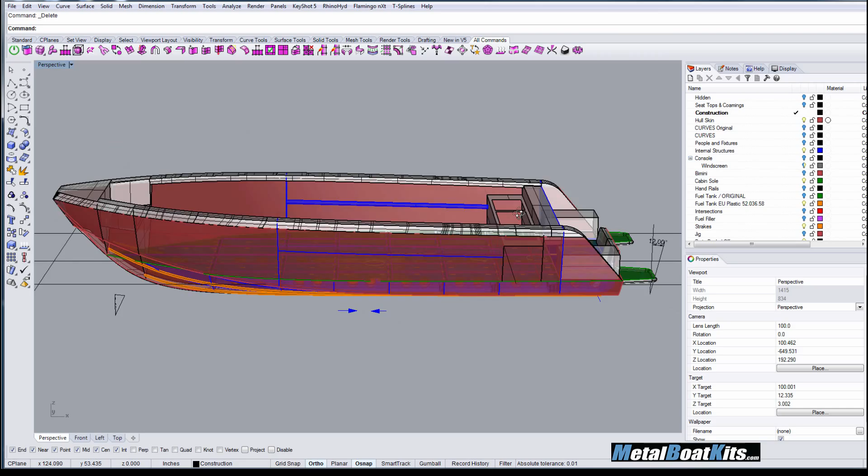I've been using Rhino since its inception, since version 1. I don't know exactly when that was, I think maybe 1997 or something like that. So I've got about 20 years of designing boats in Rhino, and I thought I might be able to share some knowledge with folks out there. So let's dive right in.

I have a 6-meter Euro style aluminum boat here. It's for a company in Europe that will be producing these on a serial basis, large production runs, so it's getting fairly involved. But today I'm just working on these little transom boxes. You can see I've roughed them in, but they need to have lids put on them and be manufactured using brake press and things like that. So it's time to jump on these and get them put together in a way that makes sense.

So I'll just run over here. I don't like to work on objects when they're intermingled with all the other objects because it's just too easy to miss and click on something else. So I usually move them aside.

I also like to point out that I'm going to keep this fairly simple. I'm presuming that a lot of people will be beginners, so if you're an advanced user, hopefully I will be having more tutorials in the near future and you can skip ahead. But this is just going to be basic stuff.

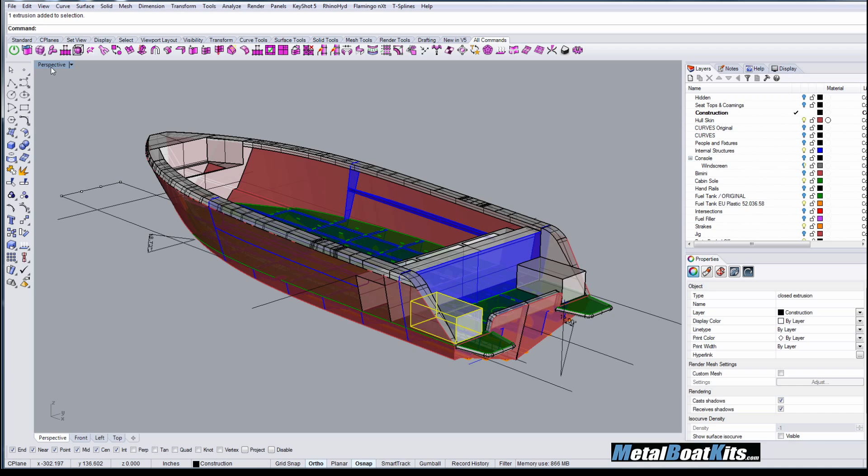So I'm moving over here to the left viewport. Double click on that, and then I'm going to hit the move command, and I'm going to move it off to about 200 units. So I'm going at minus 200 at 0 degrees. You can see up here I've typed in minus 200, that's the units, and the number of degrees is 0. And hit spacebar for enter.

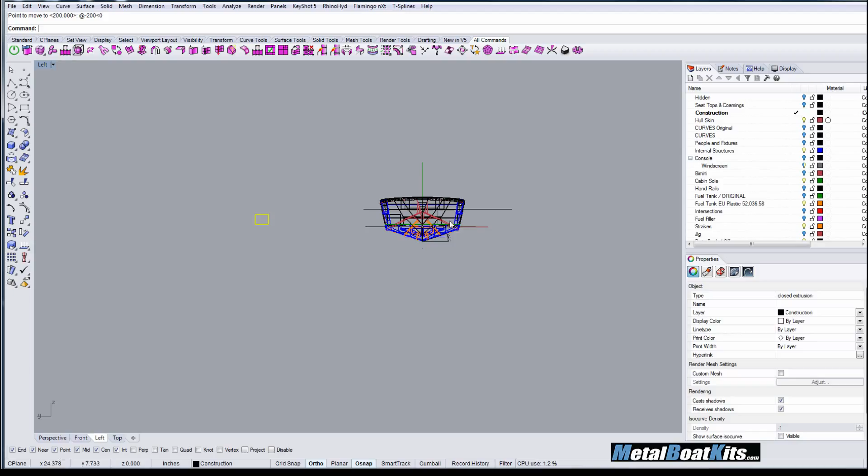Now the reason why I do that is it's a known location. I can work on it all I like here, and then I can move it exactly back to where it was. I know I just have to move it 200 units back.

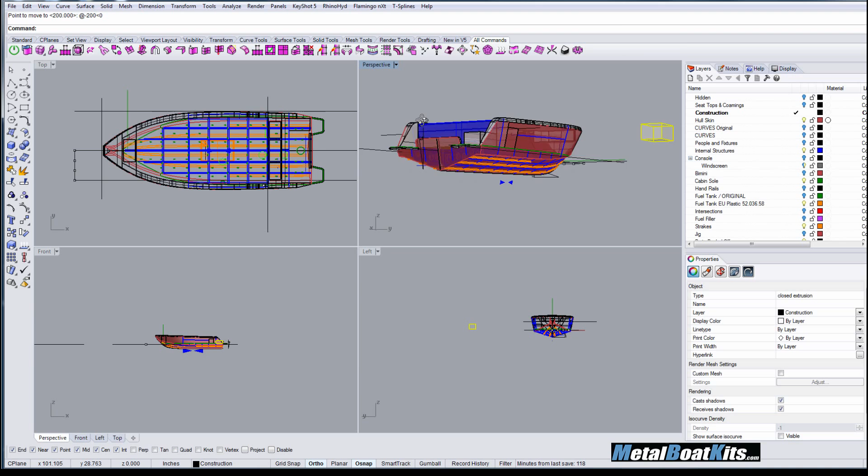So then we're up here in the viewport. I'll give you a little tip. I've activated the perspective viewport, and as you can see, it's going to be hard to try and work on it when it's floating around in space like this. I've seen some other tutorials where people are actually doing that. But what we can do is just hit zoom. So I hit Z spacebar, selected, S spacebar, and now I've zoom selected to bring the little box into the center of our viewport here.

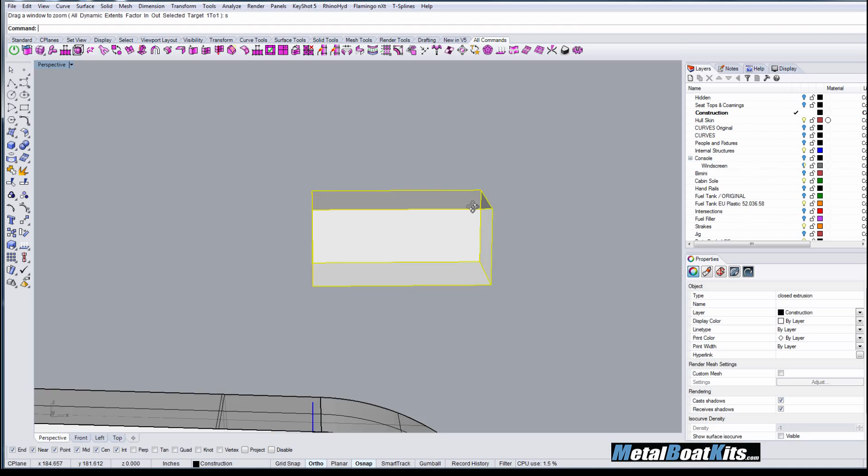And you can see the boat still over there. Let me just get my orientation.

So this is the port side boat. I'm not going to have any bottom in it because the transom, the swim grid here, is going to form the bottom of it, and the transom will form the back side of it. This will be the back side and the bottom. So I don't need the back side or the bottom, which is going to make it a little easier in production because we want to fold this on a brake press. It would be hard - I think it might be impossible almost - to fold all of this into a square cylindrical shape and then fold the ends up. You'll end up having to only do part of it and weld parts together.

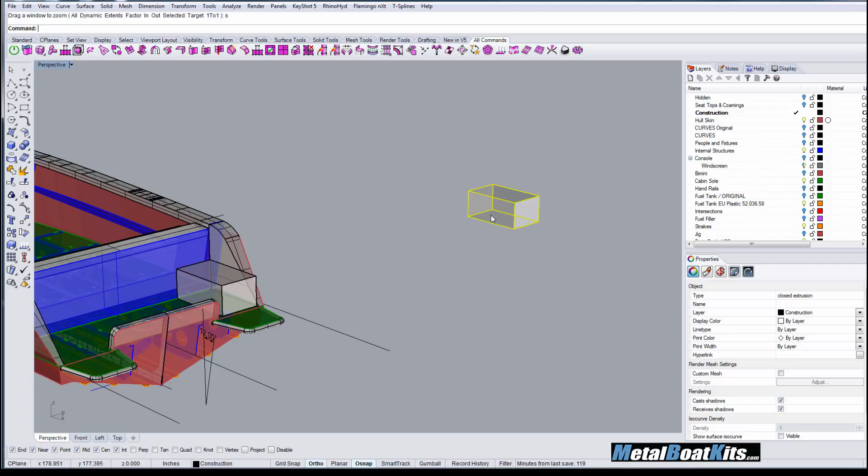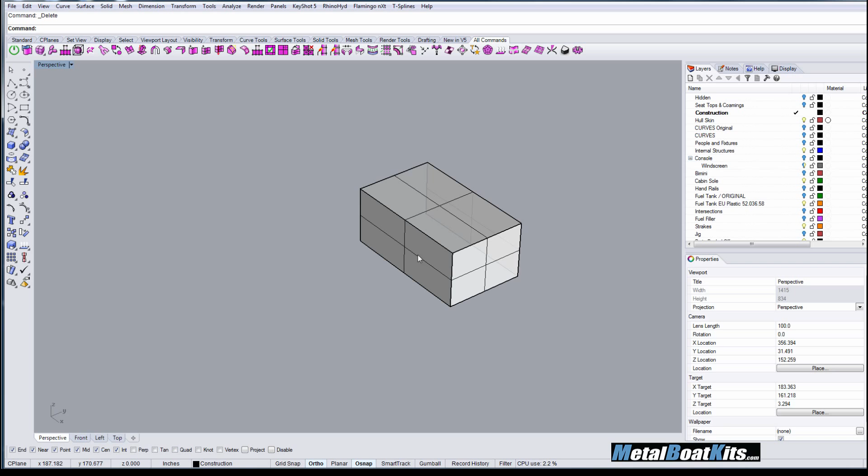So my workaround to that is I'm going to explode it using the explode command here, and then I can just delete that bottom panel, and I can delete the back panel. So now I've just got a shape like this that I presume will be a lot easier to fold on a brake press, because when it is flattened out, I would have them fold this piece up - this piece seam will be connected to the top, sorry. They would fold this part down, and then using the end of the brake press, they can fold this down and fold the other side down, so they can easily do this shape on a press.

Alright, now I need to cut a hole in the top of it. So let's just go over to the top view here. I'm just navigating using my right click to drag, and wheel mouse to wheel in and out. And we'll just get that into our viewport. And I know I'd like to have about 1 and a quarter inches all the way around.

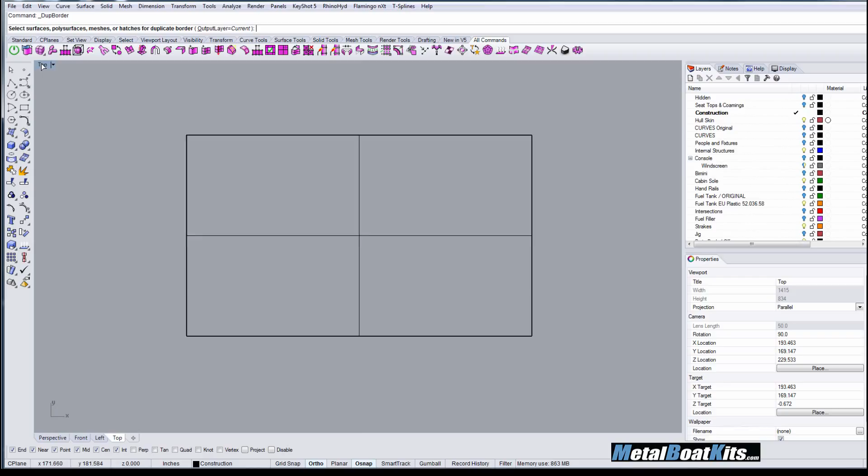So the way I normally do this is I just go to Curve, from Objects, and duplicate border. Maybe I'll actually go back to the perspective view so I know that I'm duplicating the right border here.

And right click to hit enter. So that gives me a curve. You can see the curve is around the top there. And now I'll just go offset, typing in offset.

It thinks it knows what I want, and it's right. I'm going to go about 1¼ inches, 1.25 inches as the distance there. Space bar for enter, and show it which side, and I want it to go to the inside, obviously.

The reason why I'm leaving 1¼ inch around this and not less is for the brake press operator, who needs some material to work with on each side of the fold. I found they don't complain as much when they have about 1¼ inch there.

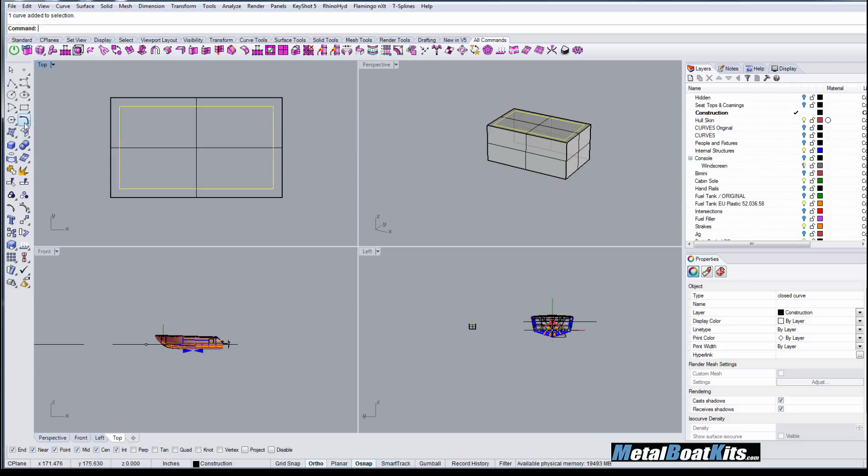Another way I always like to work is to select things first and then do my operation, so that when the operation is done, it's still selected, and I can just hit delete and it goes away. So now I select the inside curve here, and I will hit trim and simply trim out the interior, and right click to end the procedure.

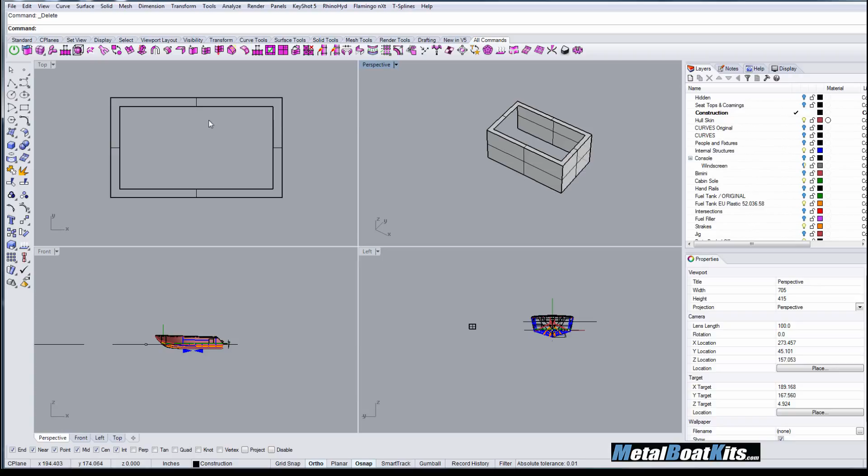Again, the line is still selected. I can hit delete and it's gone. So now I have a box with this top edge, just like that. Okay, I'm going to leave my screw ups in because I've been told that's the way to do it. I'm going to hit undo and get this edge back again.

Okay, so I have that hole cut out, and I've still got my curve selected that I used to cut the hole. I want to put a 3/16 inch flat bar coaming around this hole that will act as a lip for the lid, as well as strengthening the top of the box, as well as a coaming to keep the water out.

So I happen to know that 3/16 of an inch is 0.1875 inches, because I'm working in decimals here. So I will offset. Okay, offset.

I didn't have Rhino highlighted as the active window. Okay, so you can see here, 0.1875 offset to the inside here. Okay, so you can see now we've got two curves there.

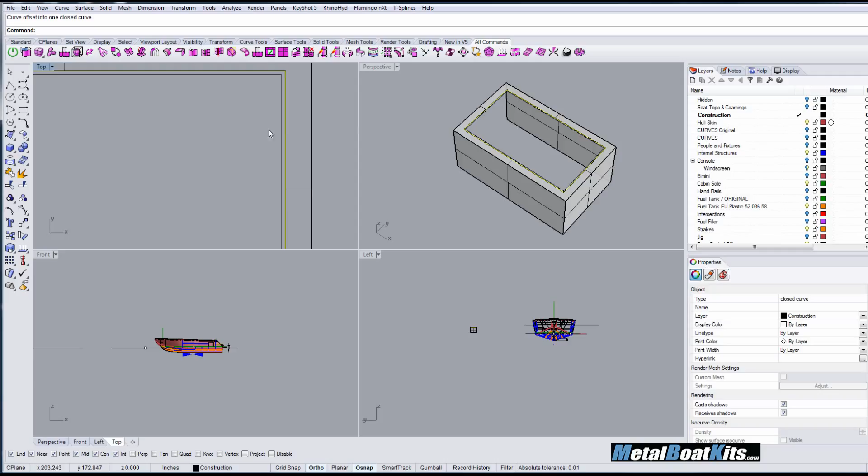Probably a little easier to work in perspective view here. So let's select both curves. There is an easier way to do this. I mean, I could have just cut this out of the original surface on the top as well, but I just wanted to show you some other commands. This is always a favorite.

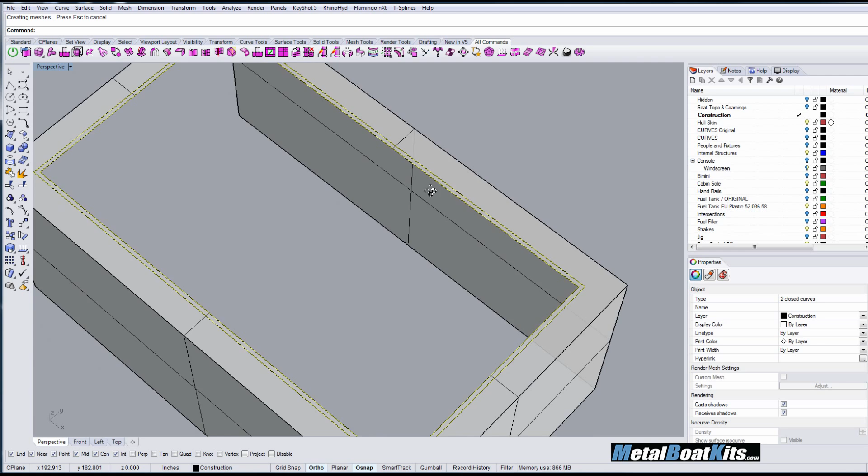From planar curves here, we can use the planar curves command, and it'll make a surface for us from the planar curves. And as I pointed out before, these are still selected, so I could delete them, but in this case I am going to keep one of them and just delete the inside one. You'll see why in a minute.

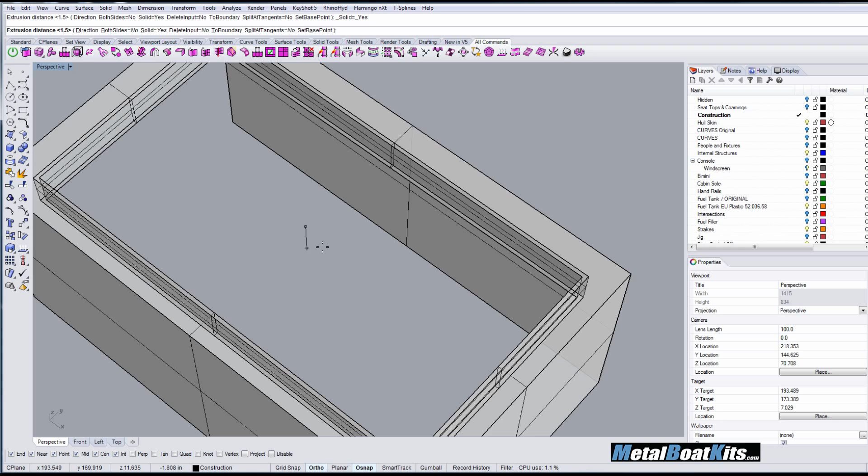So select this surface, and I'll go over to solid, and we will extrude a surface. I hadn't really thought about it, because this is non-structural, I hadn't given it much thought as to how wide the flat bar is. I think I will actually go with 1.5 inches, which is what's already selected here. So I'm just going to hit enter, and you can see it's created.

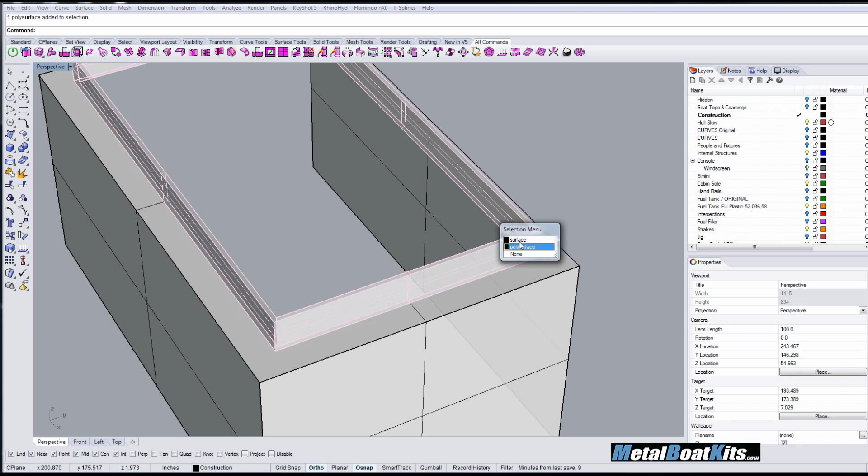I just want to get rid of that original surface. Boom, because now I've got this solid.

Just zoom in on an angle here, and we want to just move this. I have my ortho on here, so it's just going to go straight, as long as I can have a reasonably straight mouse position. I'll just bring it down for now to an arbitrary measurement. I'm not sure exactly where it's going to line up.

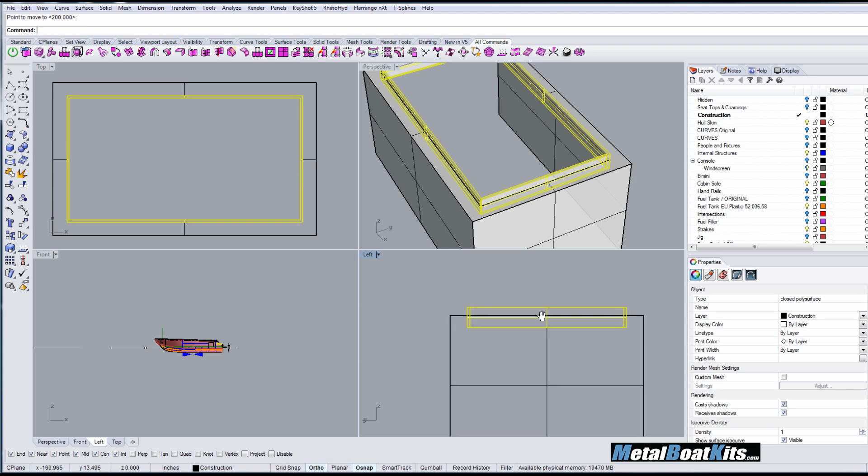Let's go back to our perspective view, and you can see that this is going to strengthen the top of the box, as well as giving us a nice coaming around it to keep the water out.

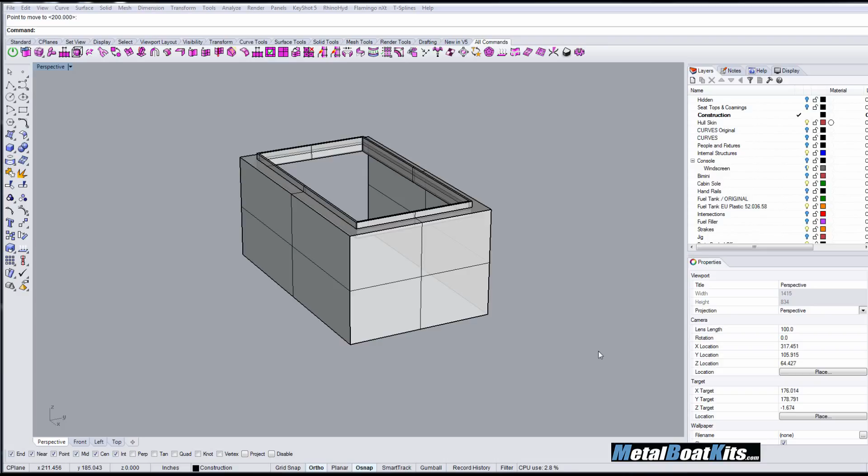So I want this coaming and the seat top, or I guess the top of the box, to match the seat tops and coamings that I have on the rest of the boat.

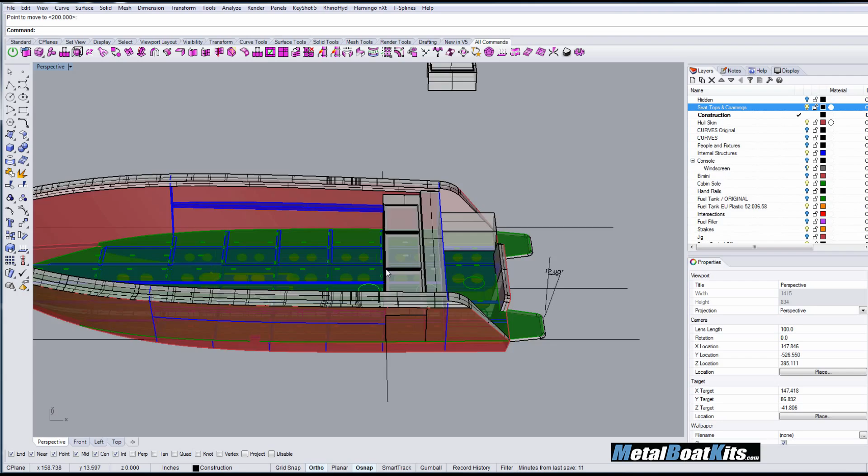So I'm just going to turn on this layer because it was off. And you can see the orbiting is way off of where I really want to be. So I'll just select, say, that top there, and just hit zoom selected. I can zoom out a bit with the mouse wheel. Now I can orbit around that perfectly and zoom in and show you what we're working on here.

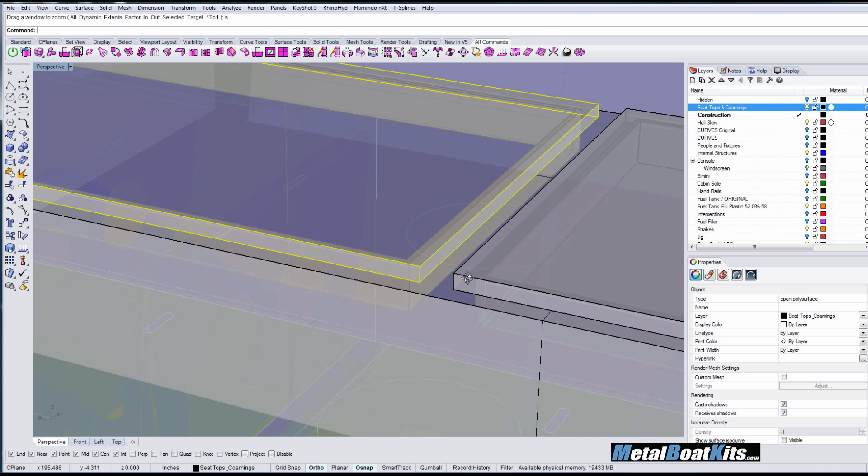Same type of idea, I just wanted to go back to visit this and see what distance I've got, how big the lip is on the cap, and also how much coaming I've got sticking up.

So that command is up here in Analyze Distance, and I just want to analyze the height of this edge around the top here, and it looks like it's probably about a ½ inch.

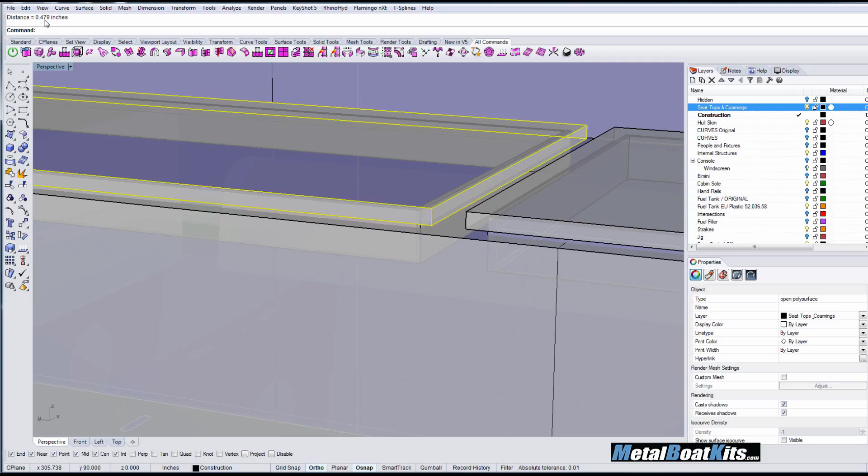Let's do the same thing for the coaming. 0.479, and I guess we've got, let's just try it again.

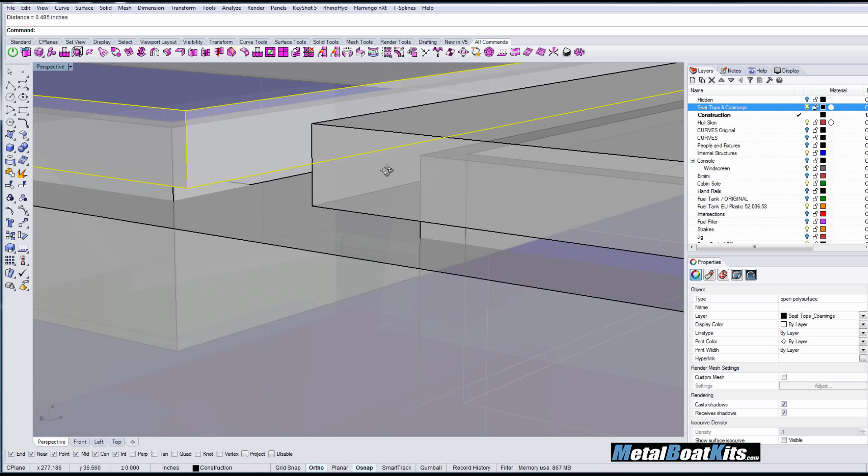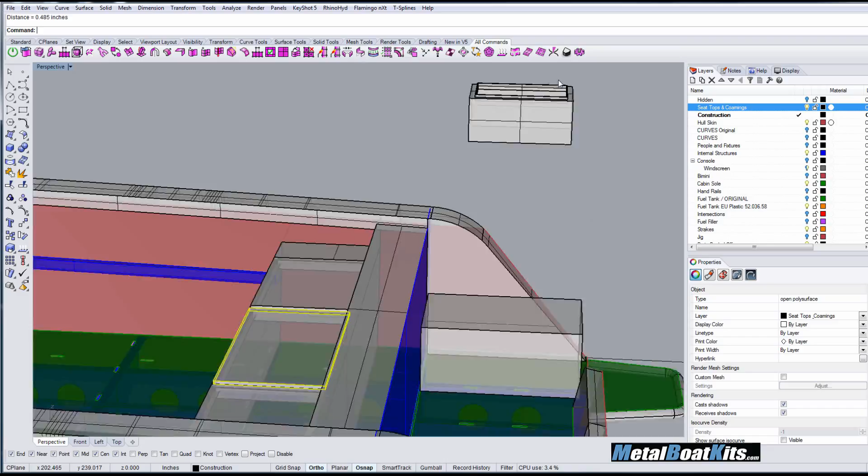I'm going to call it a ½ inch. This is not that terribly important, because the builder is going to make the decision as to how high he wants the coamings. I'm just going to give him this, in this case it's seat tops. That's why I keep referring to it as a seat top, but it's going to be a lid for this box that we're building. So let's just go back to that.

Zoom selected, and I think I'm going to go back over here to this. I'm just going to eyeball this. Escape, deselect, select that. I'm just going to eyeball this down to there.

And then I'm going to move it up to maybe 0.6 inches. So I'm going to go at 0.6 inches at 90 degrees. Again, up here in the command line, at 0.6, which is my units, inches, at 90 degrees, which is vertical. Hit enter, and she's popped right into giving me about 0.6.

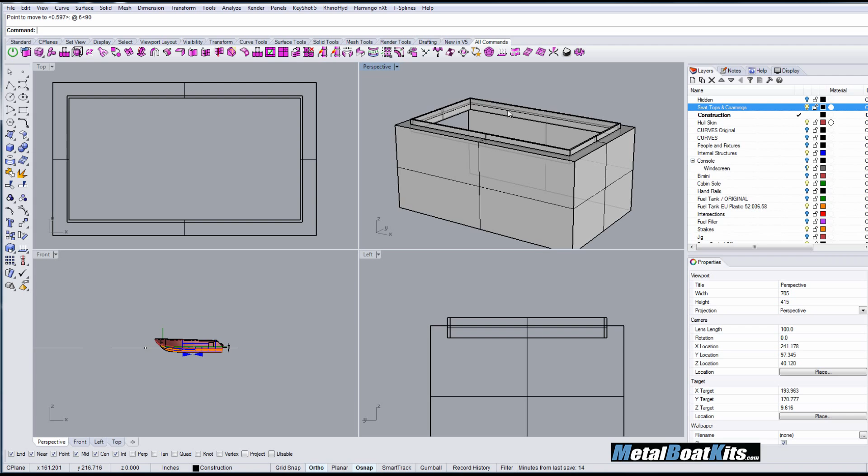So I can do a ½ inch lip and know that I have enough clearance there. And again, the coaming is going to be completely up to the builder, so he might want more, or he might want less. And he might use whatever flat bar he has on hand, to be honest with you.

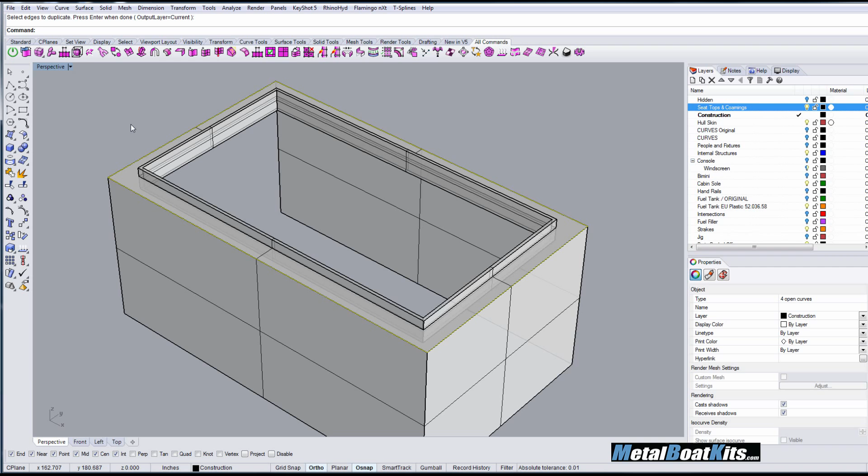So, okay, I just want to create another curve, network of curves here. This time I'm going to use the duplicate edge command, just to show you guys that one. This is asking me whether I want it to duplicate the edge of the side or the edge of the top. In this case, it doesn't matter at all because they're the same. So I just want 4 curves. Right click to hit enter. J for join.

Okay, so now we're at the point where we're going to create a lid for this. I know from the other seats and everything that it goes about 0.3, 0.4 inches beyond the coaming. With this, so what I'm going to do...

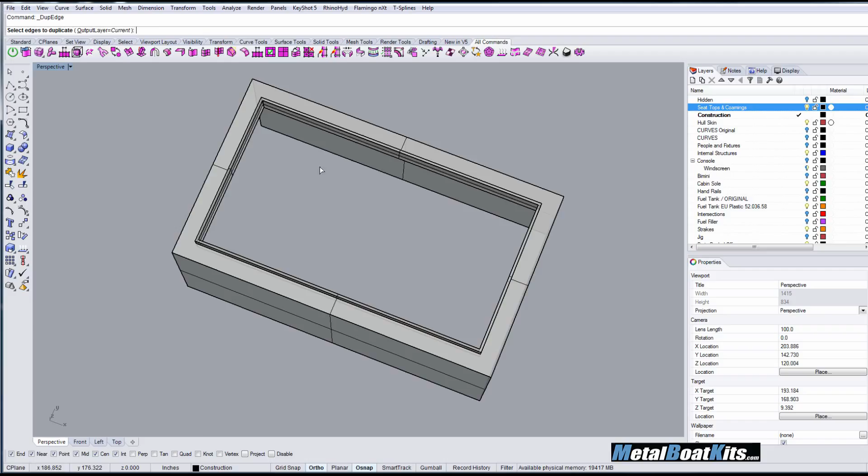Is go back to curve from objects, duplicate edge, and I'm just going to duplicate the edge around this coaming here. Again, oops, wrong one. And while we're in the command, we can hit Control and deselect that, and just get a better view of these things while we're selecting them.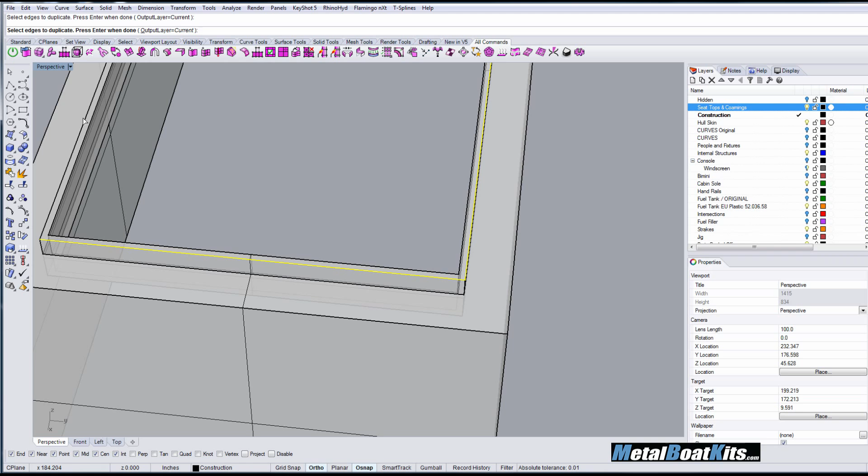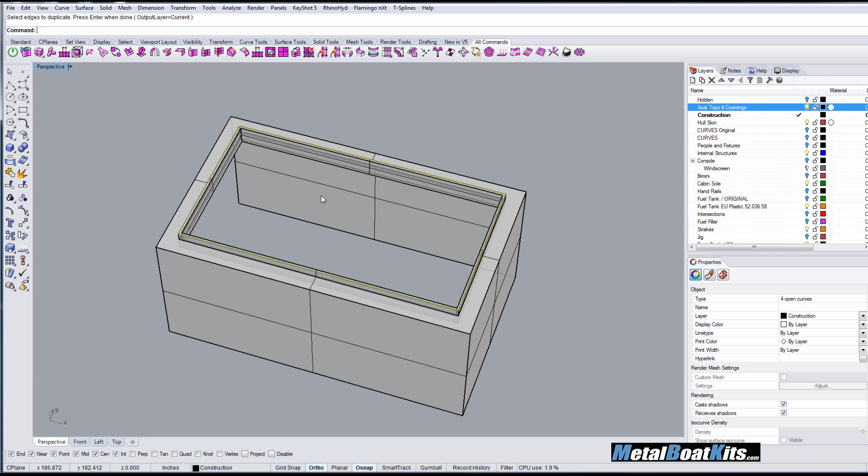You'll notice when you're using the mouse to zoom in and out, it zooms at the point where the mouse is. So if I want to look at this piece over here, I put the mouse over it and zoom in. One of the many wonderful functions of Rhino. So I've selected those outside edge curves there, and I'm going to right click to hit enter. And I'm just going to hit J for join, just for good measure, in case I lose the selection, so I can easily select them all again.

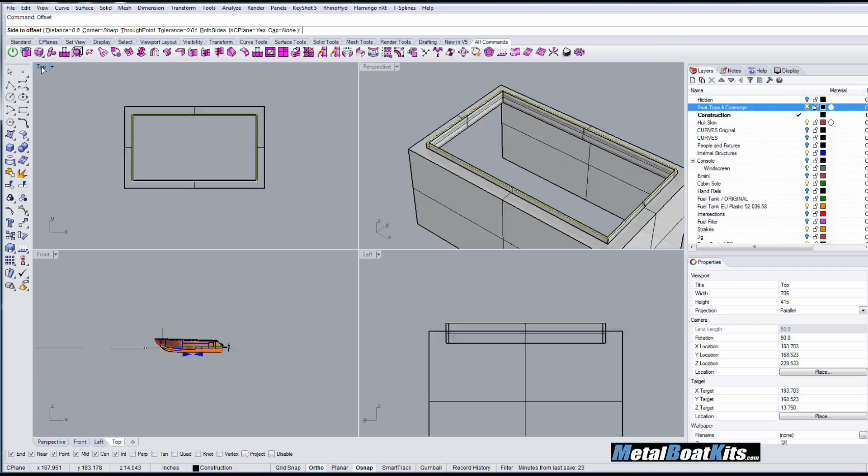And then I just want to offset this again. So I type offset. And perhaps easier to show you this from the top view. Again, so I think probably about 0.4, because this is probably going to be 1/8 inch thick material, 2 millimeter kind of stuff, 2 or 3 millimeters. So I'm just going to go 0.4 to give myself some clearance.

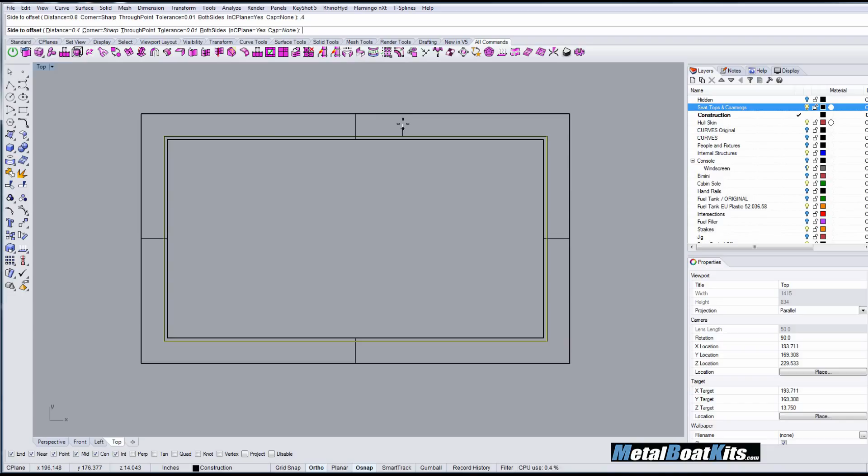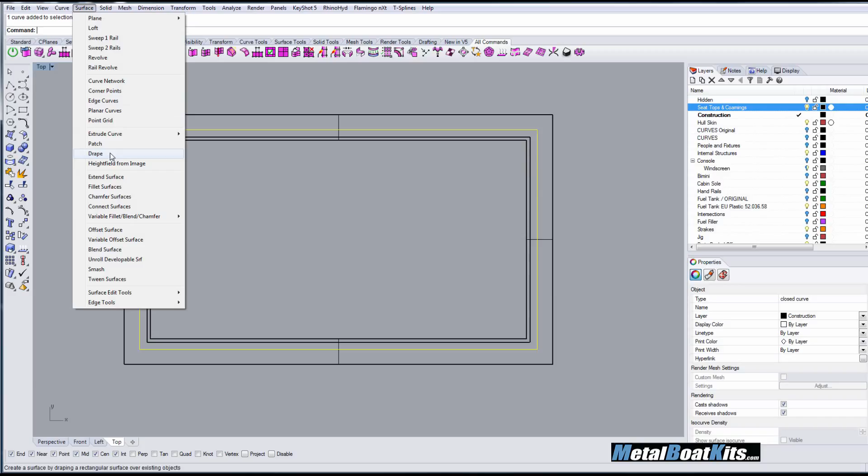Once the part is press brake into shape, I'll show you what I mean in a second. And I'll probably just delete those curves. Take this curve and make a surface from it, from planar curves, that gives me a surface.

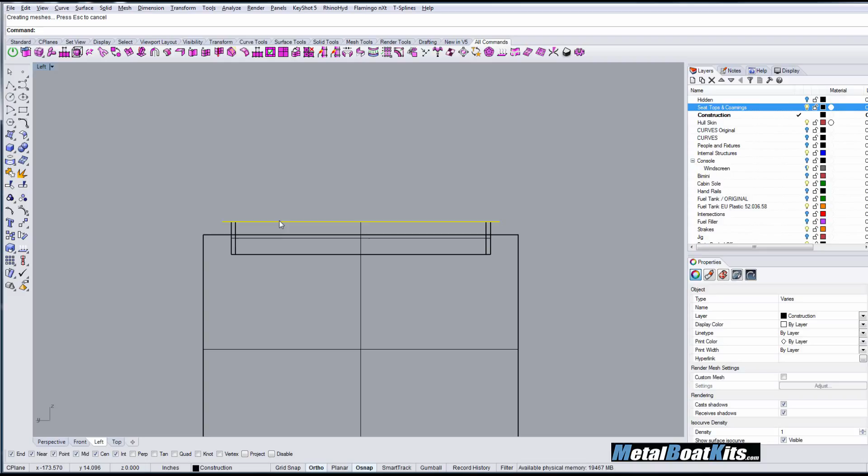And I think I'll just select the curves and that outside perimeter curve and the surface together. Go in here to the front view, which actually says left view. And I'm going to hit the Alt key and the up arrow and just move it up just a little bit, because for right now it doesn't matter where it's actually sitting. Let's go back to our perspective view.

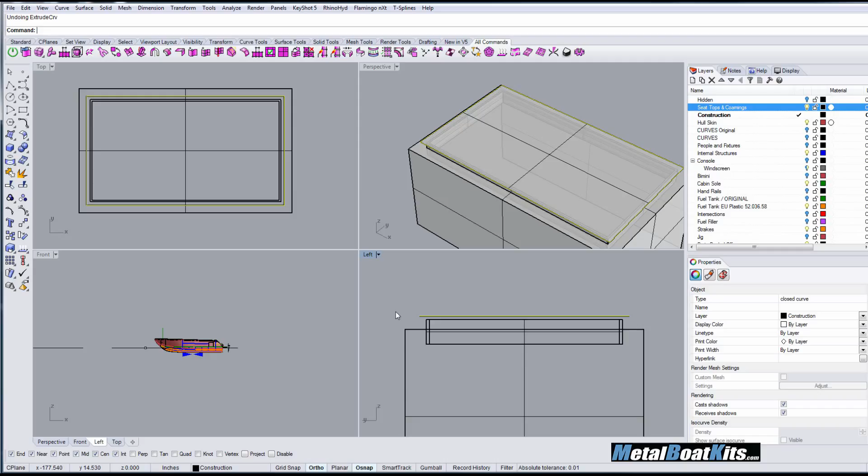And we want to select that outer edge curve again, and we're going to extrude this down 1/2 inch to match all of the rest of our hatch covers and seat tops. So, surface, extrude curve, straight, and we're just going to type in the amount, 0.5 inches, hit enter. Went the wrong way, of course. So, Control Z, hit enter to repeat the last command, and we're going to go minus 0.5. Obviously we want it to go down, not up. I'll leave my mistakes in for you.

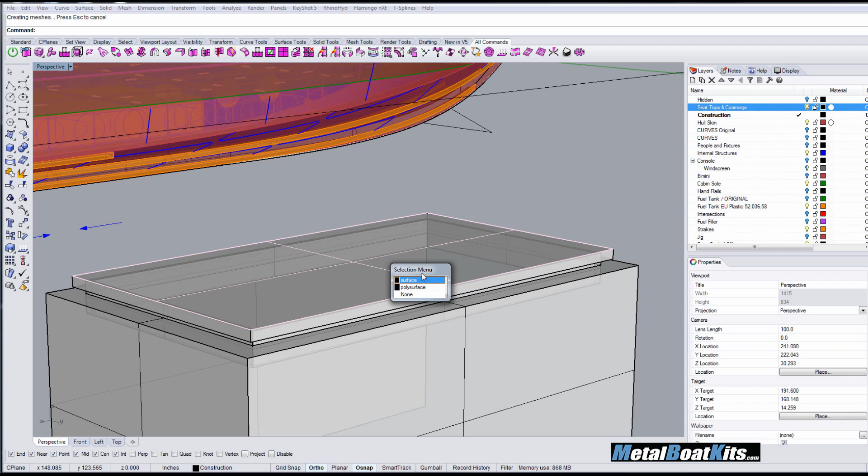And again, this is all we're really trying to accomplish, getting this top section and the box itself. So we're not too worried about it looking a little silly sitting up so high here, but when the builder builds it, it'll be further down to suit his hinges and things. So I'll show you what I mean.

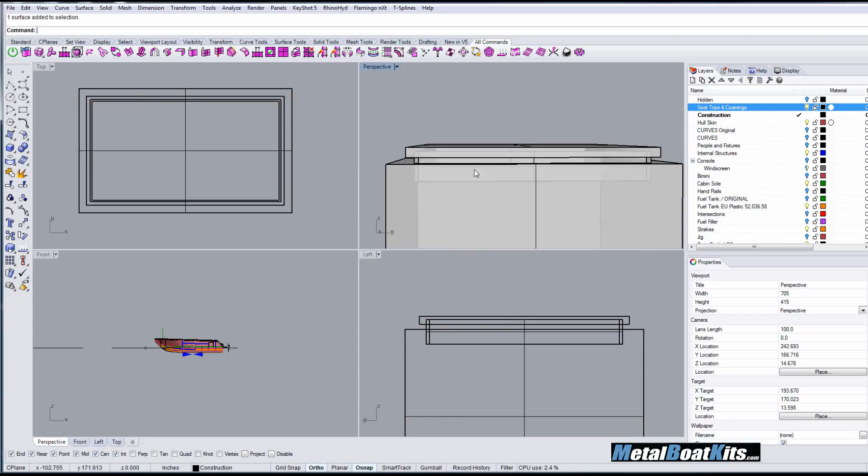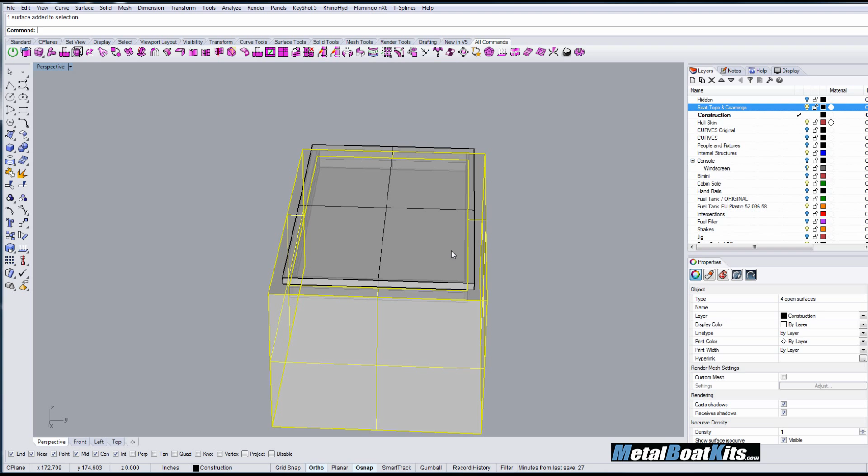I'm probably confusing you, but first I'll join everything that I need joined here. I'm going to hold Shift, select all these surfaces. Oops, Control and deselect that. So this is giving me the top and the sides of the box. J, and spacebar to join those.

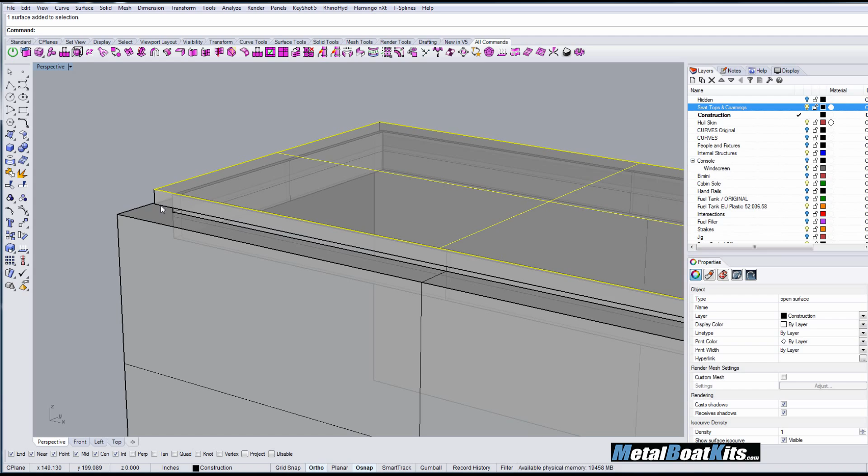Oops, right click to get out of that command. Selecting the top surface, and shift to select the edging all the way around it. Because it's one surface, it selects in one piece. J and spacebar to hit enter to join that all into one piece. So now we've got a lid and we've got a box.

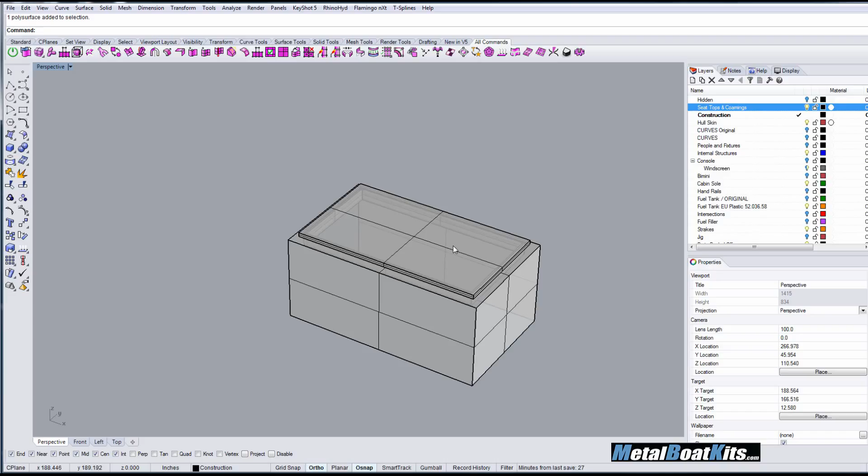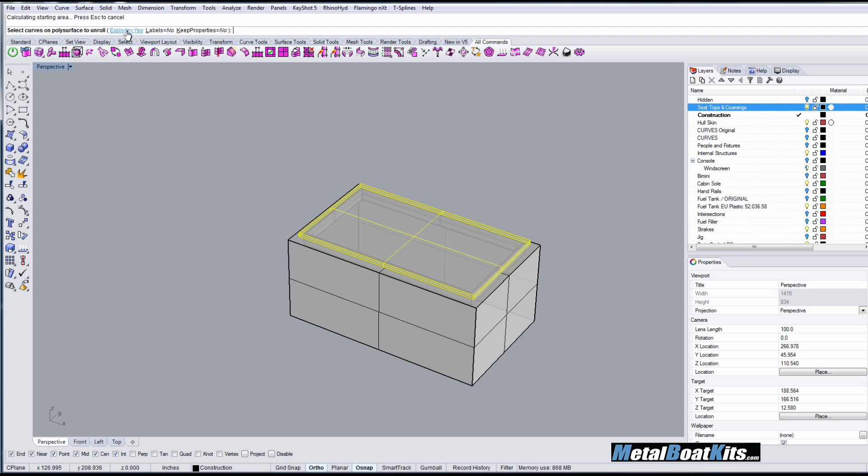And later when we unroll developable surface, I hope I'll show you what will happen. We go here, surface, and unroll developable surface. Explode, no, because if it was left at explode yes, these will become 5 separate pieces, and we want it to remain joined. And Rhino makes a good guess at where we want the joins, but usually gets it wrong. So I'll just show you the process of doing this.

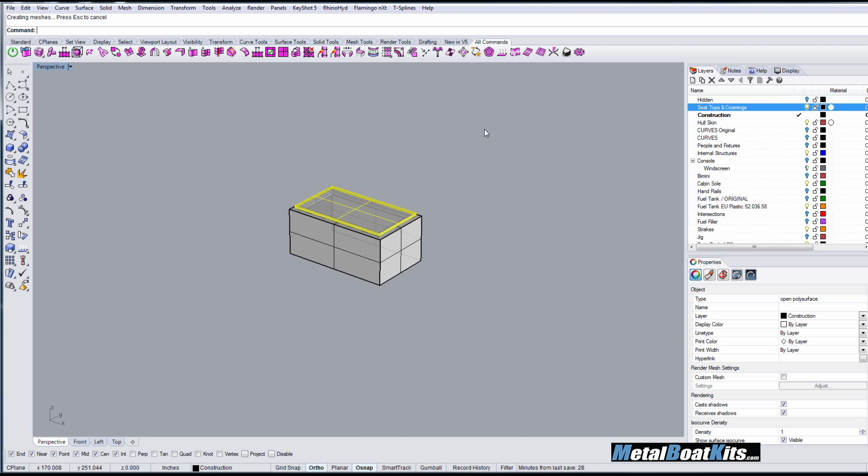Keep properties. In this case, labels. This kind of thing is not really necessary. That would just show us where the edges were, where everything was joined, and this is a fairly simple piece, so we know where it was joined before. So I right-click to hit enter, and it's going to get messy, but where did it put our parts? Yeah, like I said, it's going to get messy. Here are our parts.

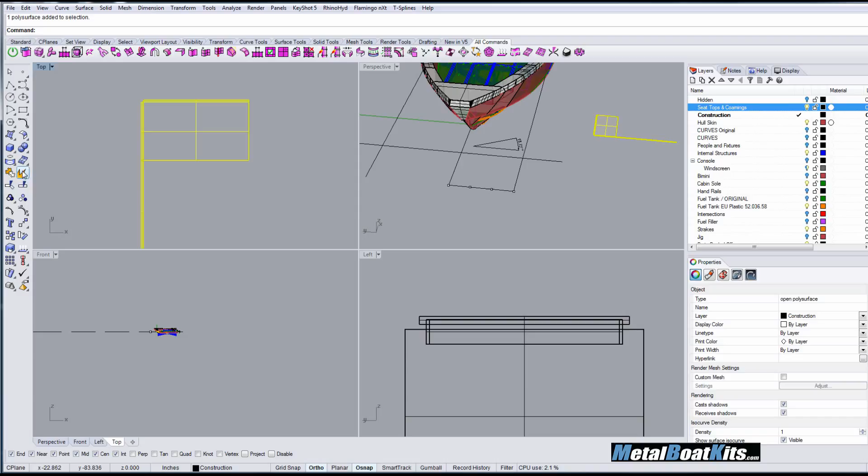And Rhino made a fairly good guess at where it thought we wanted all the parts joined up, but it didn't get it completely right, so we'll explode this. See, it's got this edge and this edge in the right place, but it thought that the other 2 edges were joined end to end. Typical type of situation, and it's really easily fixed. We hit explode, and now we've got this piece.

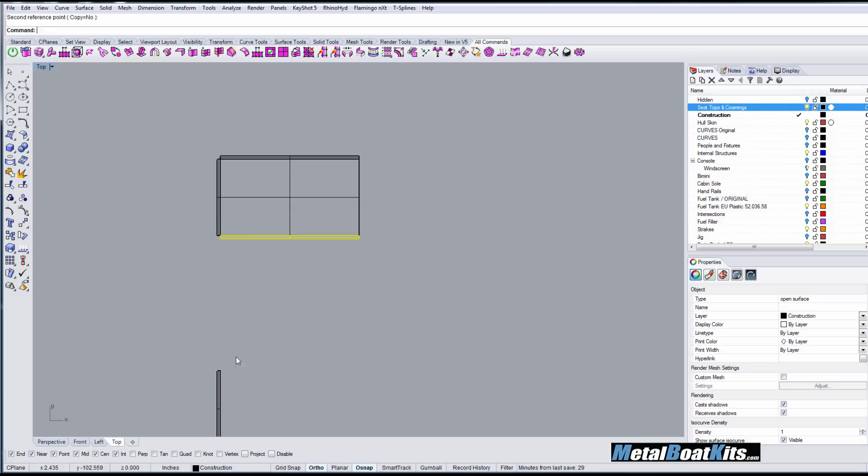We will go to rotate, select it right at the corner there. We've got our ortho on, so it's going to snap there. And I'm just going to undo that. One sec. I should have done it with both of them. Like that. Do it again. And there's our box top. I would rejoin all of this. J and enter.

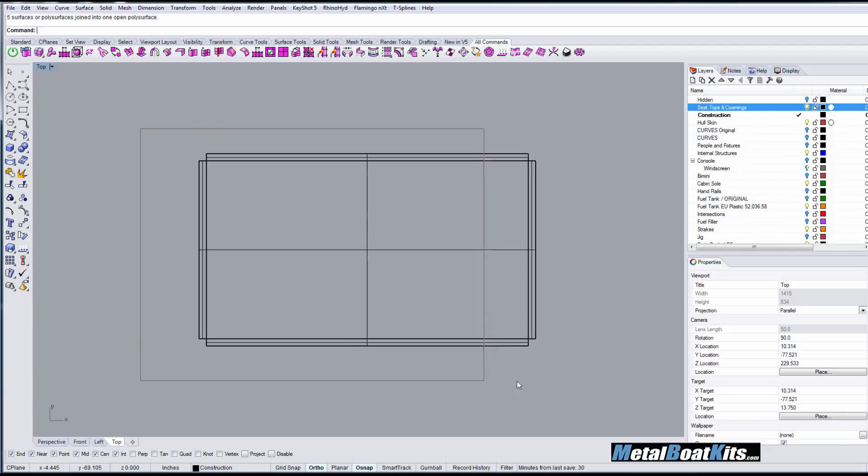And then, because we want to send it out to CAD, we go in here, curve from objects, and just duplicate the border of the whole thing, and delete our surface. And this gives us what we want to give to the CAD guys. And I would just draw in some lines like this for the CAD fellow, and usually make this a different color, like green, and put an indication and just say fold up 90 degrees on the green line after it's CNC cut for the perimeter.

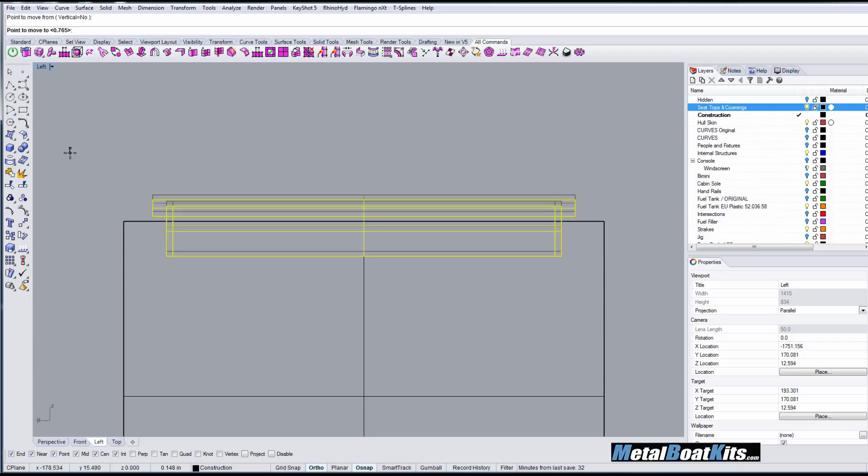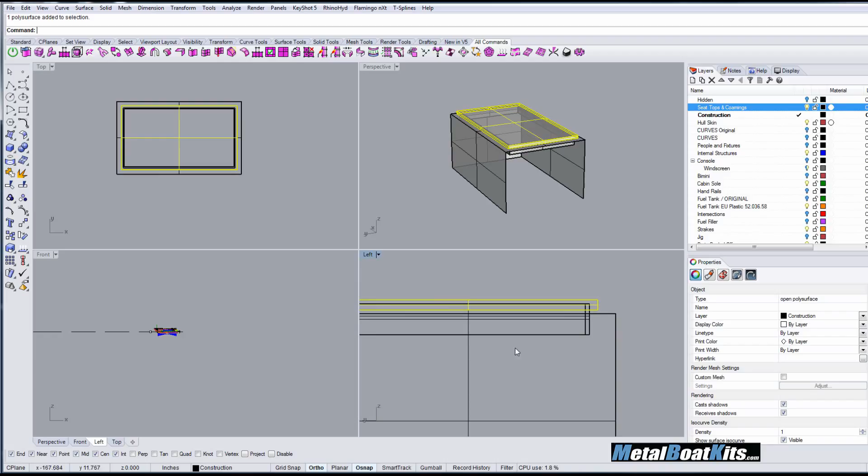Okay, and as I was saying earlier, this is sitting a little bit proud, it's too tall. And me moving stuff right now is just for aesthetics, because I'm going to be taking this out to a nice rendering for marketing. But that kind of gives us our box. It's going to be opening to the left. Where's my boat? It's on that side of the boat. The left side will be opening. And so I'm just going to rotate this up a little bit, just for aesthetics.

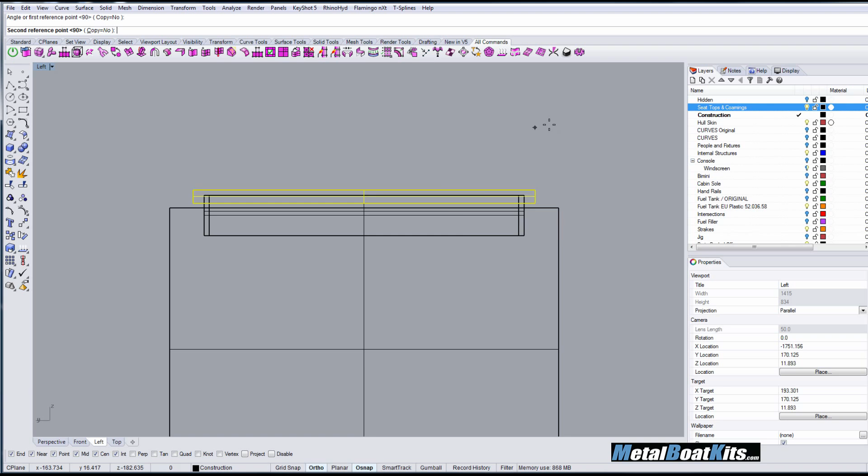And here's another tip for you. See how I've got my ortho on and it's snapping all around. So it would snap to 45 degrees. And honestly, maybe 45 degrees is what I want in this case. But you can just hold shift down. This is a tip I want to give you. You can just hold shift and it overrides that ortho. And that goes for anything where you've got a snap happening. You can just override your snaps by doing that.

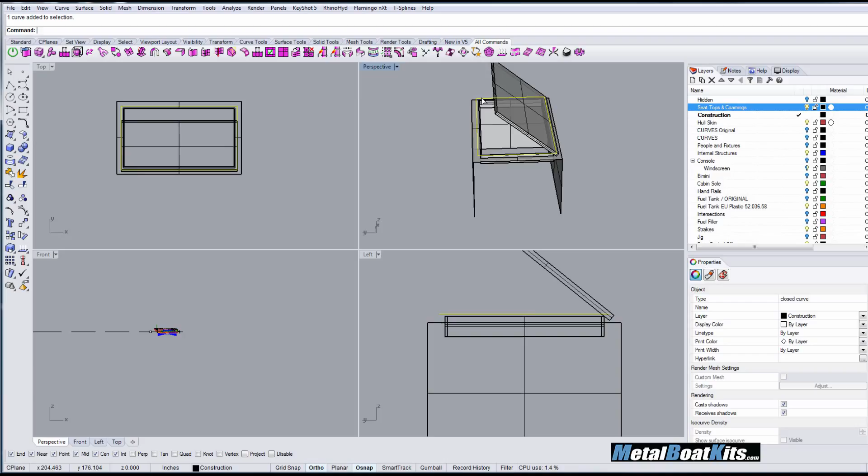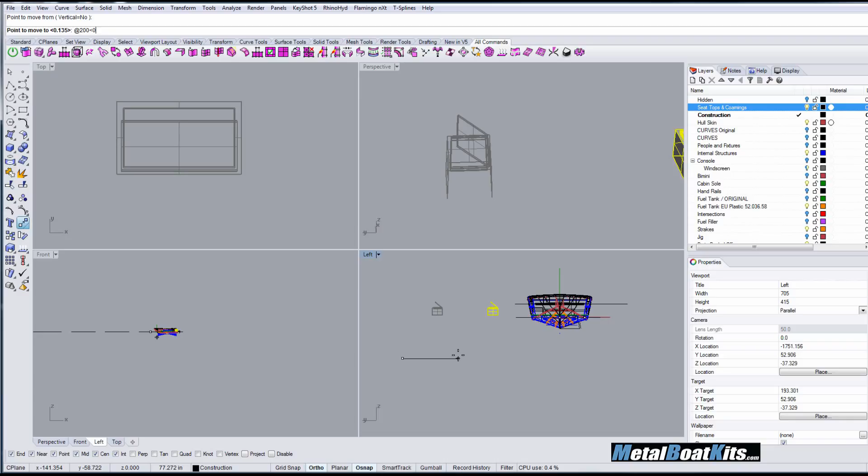We'll just leave the box lid open and delete that curve that we don't need. So let's select it. And this is what I was showing you earlier. I can just move it back into place on the boat. Hit the move command. I want to move it 200 in the positive direction, so it's not a negative, it's just 200 at 0 degree angle. Just keep it level. So again, 200 at 0 and hit enter.

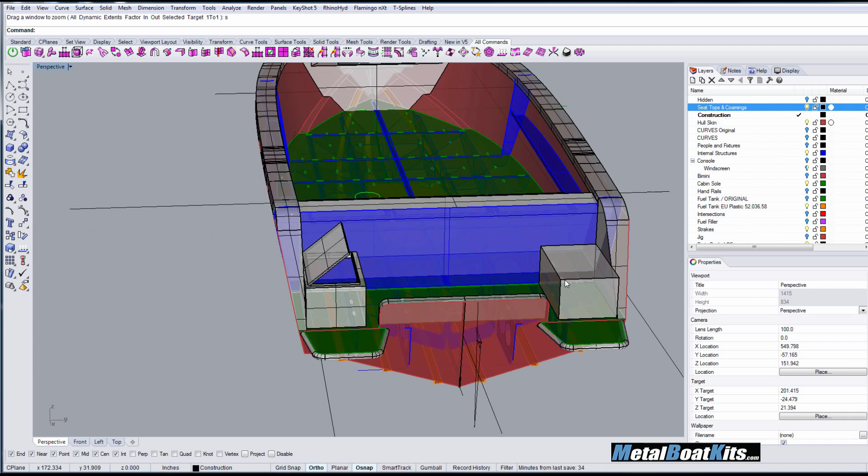And let's just go into our perspective and zoom selected. And there's our box on our transom, just where we want it. And I'll get rid of this dummy box that was there.

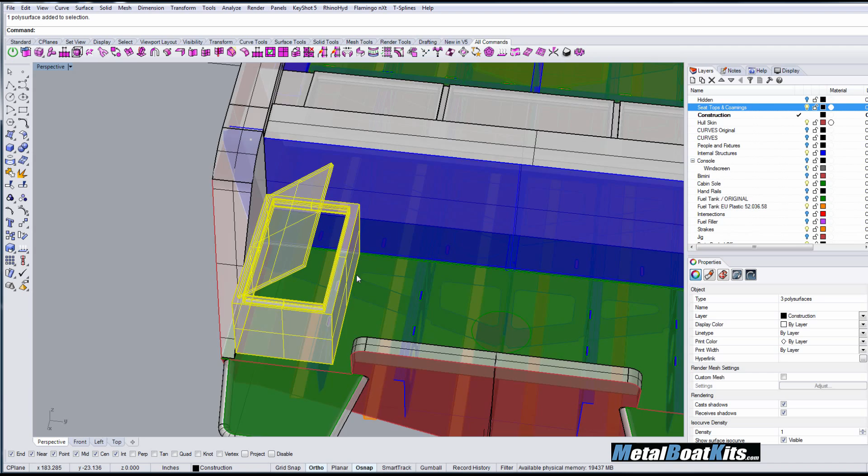And I should have just left that selected, or I should have grouped it. But there we go. There's our box. And because it has no bottom in it, we're saving some material, we're saving some weight, and it's got no back on it. So this will be welded, fully perimeter welded, and the welder can weld this thing from the inside. And that will give us a nice watertight box.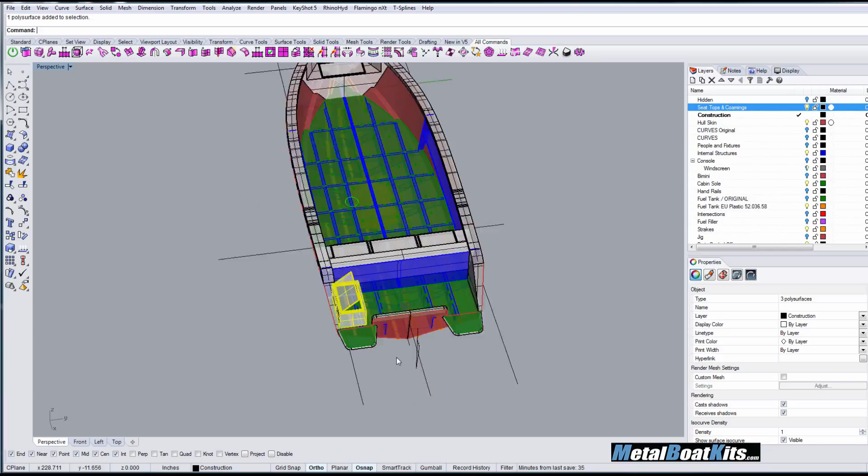They'd spec this. I'm not sure exactly what they want to use it for. Perhaps battery boxes or bait box or just storage. But I always make sure I have some guidelines around the boat when I'm designing it. So I've got this center line right here, and I'll just take this whole box, type mirror up here to mirror it. It asks me for the center line of the mirror, which is my center line of my boat. I just pull that out, and it gives me a perfectly mirrored box on each side.

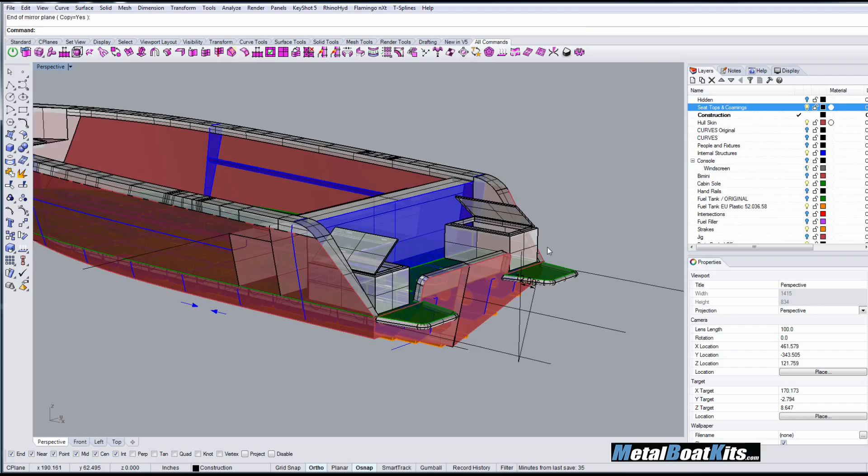Oops. Used to working on a bigger screen, so I keep going to increase the screen size. And I'm just working in a small window for the capture stuff.

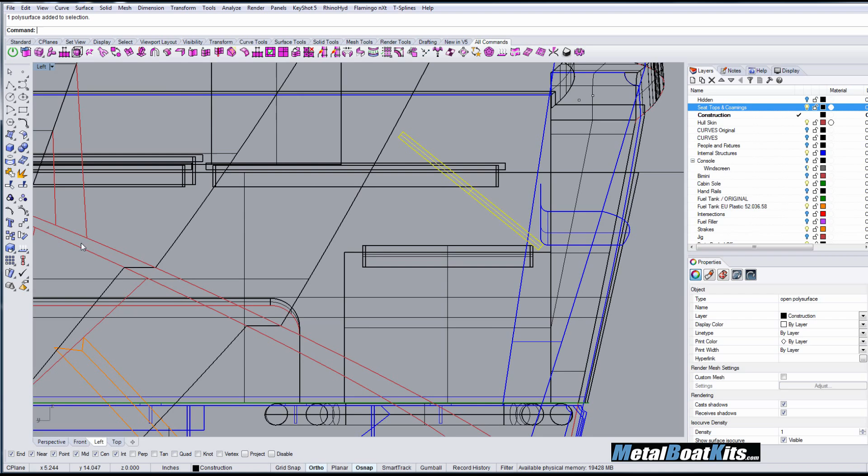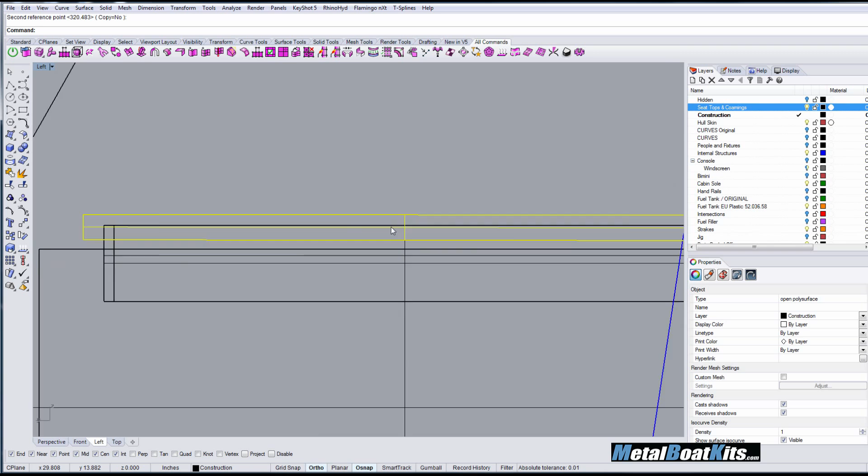So anyways, I'm going to just undo this, and I'm going to rotate this thing back down again to 90 degrees flat. And go over here, rotate. Boom. Get out of all of my snap areas. And again, let's just eyeball that, because close enough for now. Again, this is not at this point being constructed. Let's grab our coamings, our lid, and our box again, because this is a handy angle.

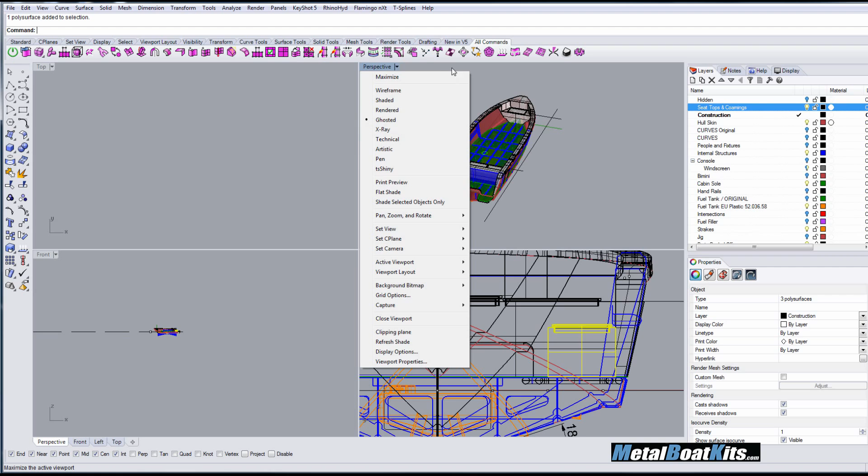You'll also notice that I'm working my perspective view in ghosted mode here. It allows you to see the surfaces better, and the rest of my viewports I normally work in wireframe, so I'm looking at this from the front of the boat, so I can peer right through the entire wireframe and select that at the back. It's just my preferred way of working, but in later tutorials I'll show you why in some cases I will work in the flat views in

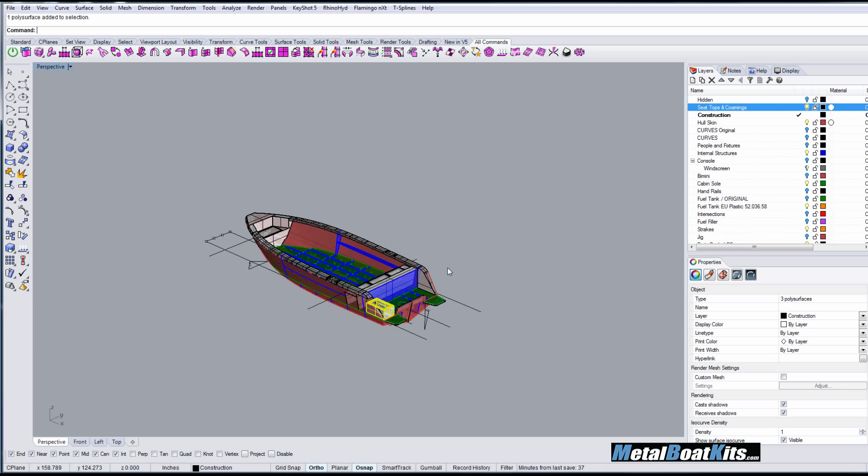a shaded mode as well, just so that I can select inside surfaces. Like when you're in a wireframe view, and this is obviously the boat side here, if I clicked on it, it wouldn't select it. But if I put it in a shaded mode, I can click in the interior of surfaces. Makes for handy trimming and stuff. Like I said, I'll show you that in the next video.

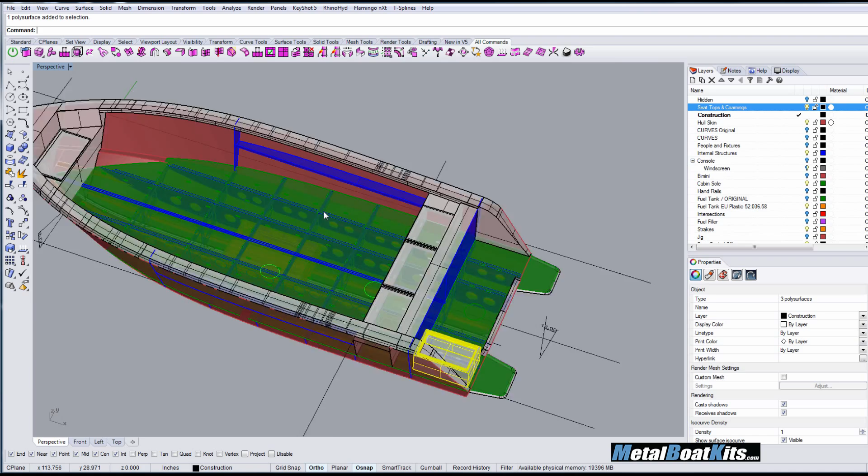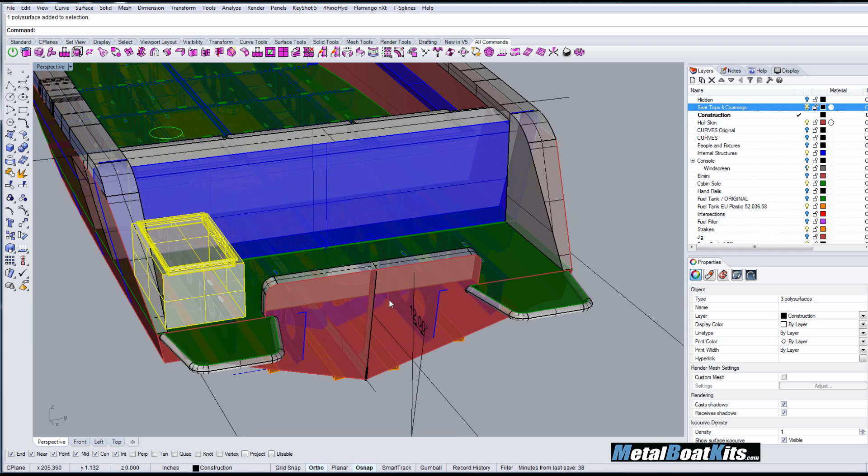I think I'll probably cut all the holes for the decking here. This is going to be a watertight deck, and a self-bailing deck, so it'll be welded down, and then all these holes are from a previous build. This has been a recycled part, so I have to move all of these holes for slot welding so that they can slot weld the deck down to the internal structures. And like I said, I'll make a quick little tutorial just to show you how to trim stuff in the middle of surfaces when you don't have isoparms to click on.

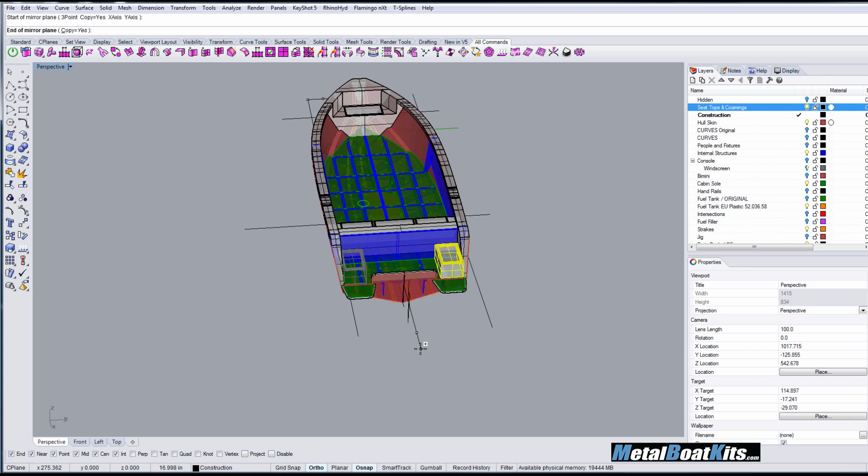So back to, I just wanted to close the lid so that it looks better for rendering later. And then we just want to mirror. I know there are clickable commands for that, but I grew up in the early days of AutoCAD typing everything in, so I find it faster, in fact, and less clicking, so less carpal tunnel. And let's just hit save. Might take a minute because this is a very large drawing.

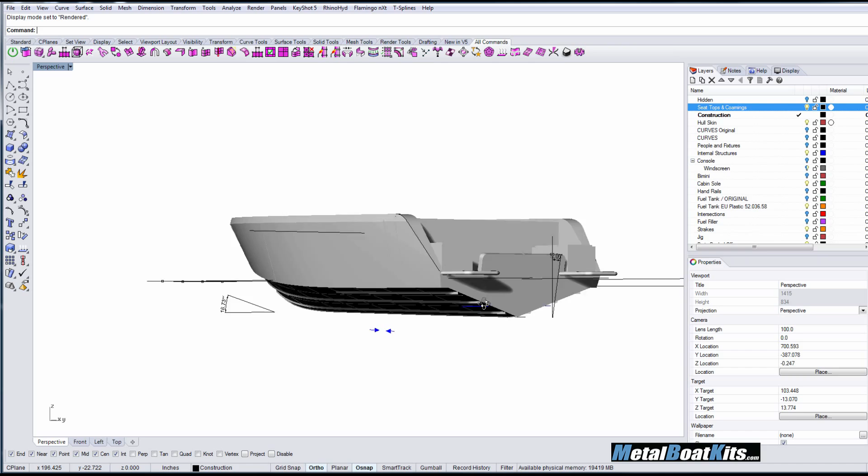And let's just have a look at this in rendered view. A little bit easier to see the lines of the boat and everything. So I think the client's going to be happy with these boxes. The rest of this boat should be done in a few days. A boat like this takes me about a month and a half, I guess, including all of the design work. The design work is pretty slow. You want everything to look aesthetically pleasing as well as structurally sound and watertight and seaworthy. And that's a pretty involved process. This is actually getting down to the fun stuff for me.

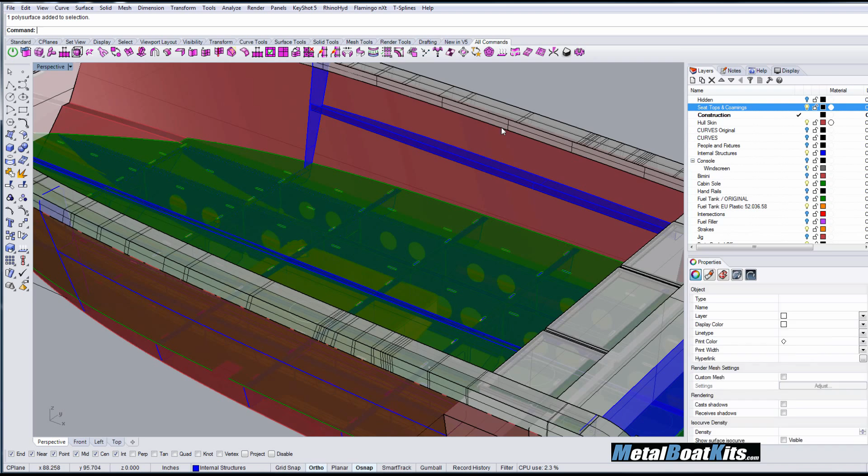And let's just go back to, like I say, I like the ghosted view because I can click through, I can grab some internal stuff if I need to. And that's about it for my first video, for my first Rhino tutorial.